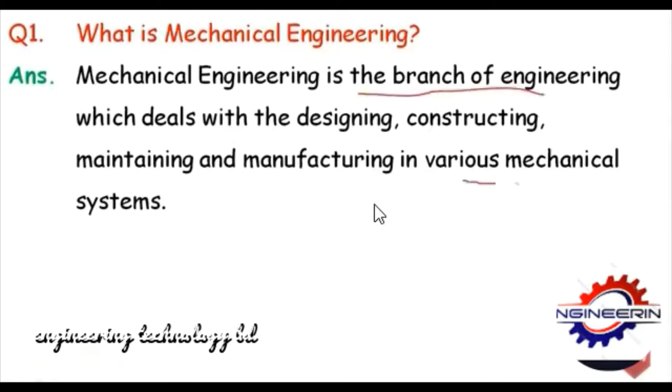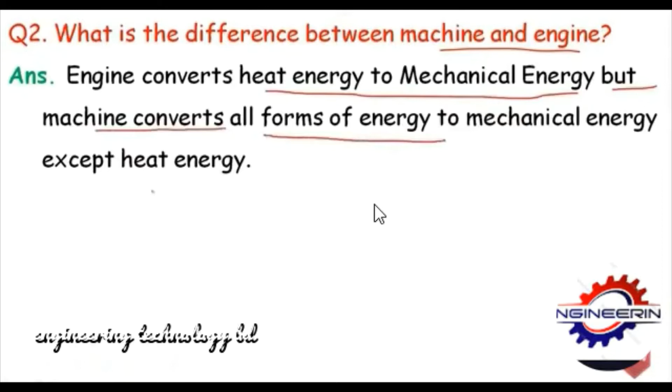Mechanical engineering is the branch of engineering which deals with the designing, constructing, maintaining and manufacturing in various mechanical systems. Question number 2: What is the difference between machine and engine? Engine converts heat energy to mechanical energy, but machine converts all forms of energy to mechanical energy except heat energy.

Question number 3: What is pump? What is turbine? What is the difference between the turbine and the pump? Pump is a device which transfers mechanical energy to the fluid energy. The turbine does the opposite. It transfers the flow energy of the fluid to mechanical energy.

Question number 4: What are turbo machines? Turbo machines are devices which transfer energy to or from the fluid by the dynamic action of rotating blades. Question number 5: What is the difference between the centrifugal pump and positive displacement pump? In centrifugal pump, the flow rate changes with the head, but in a positive displacement pump, the flow rate remains the same.

Question number 6: What is the difference between the heat engine and heat pump? Heat engine produces work and transfers energy from high temperature to low temperature medium. In a heat pump, external work is needed to transfer energy from low to high temperature medium.

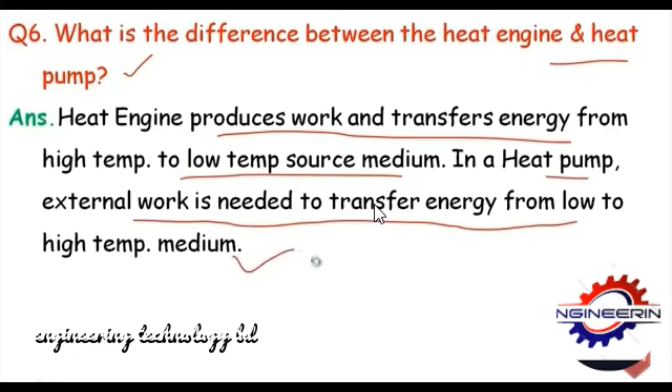Question number 7: What is the difference between impulse turbine and reaction turbine? In impulse turbine, all the pressure energy is converted to kinetic energy, but in reaction turbine, a part of the pressure energy is converted to kinetic energy and the rest remains as pressure energy. Number 8: What is gear ratio? It is the ratio of the number of revolutions of the pinion gear to one revolution of the idler gear.

What is the difference between a machine and a mechanism? A mechanism consists of links forming a constrained kinematic chain. Its function is basically to transmit or modify motion. A machine is a mechanism, but here we are concerned with the force to be transmitted and it is used to modify mechanical work.

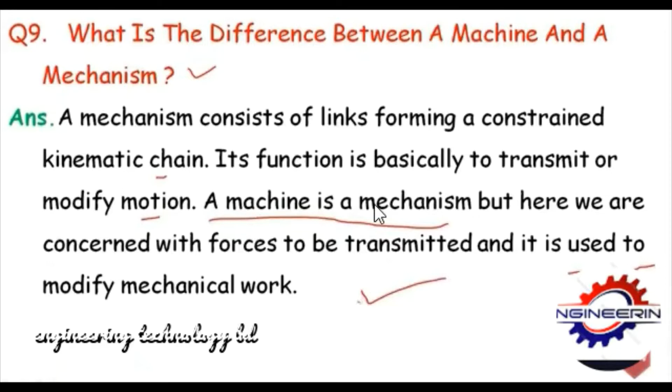Question number 10: On what factors does the efficiency of a pump depend? Efficiency of a pump depends on the size, speed and proportion of the impeller and casing. Number 11: What are the losses in a centrifugal pump? The losses in a centrifugal pump are friction losses due to eddies in flow, leakage, friction loss due to rotation of impeller in chamber of water, gland and bearing power losses.

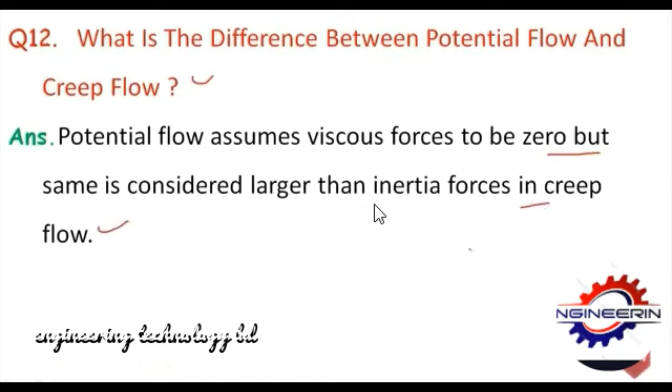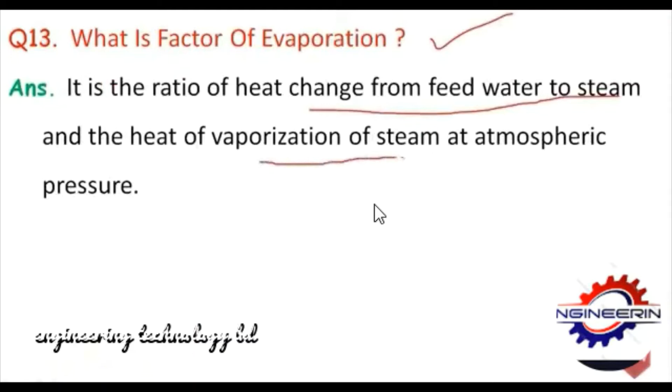Question number 12: What is the difference between potential flow and creep flow? Potential flow assumes viscous force to be zero, but the same is considered larger than inertia force in creep flow. Question number 13: What is factor of evaporation? It is the ratio of heat change from feed water to steam and the heat of vaporization of steam at atmospheric pressure. Question number 14.

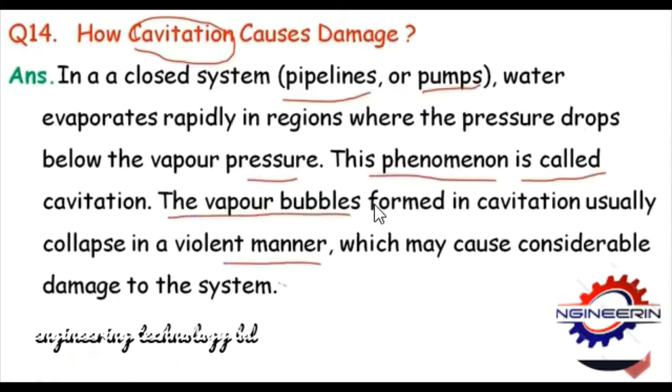How does cavitation cause damage? In a closed system, pipelines or pumps, water evaporates rapidly in regions where the pressure drops below the vapor pressure. This phenomenon is called cavitation. The vapor bubbles formed in cavitation usually collapse in a violent manner, which may cause considerable damage to the system. Question: What should be done to avoid cavitation in pumps? In order to avoid cavitation, the suction lift and the operating.

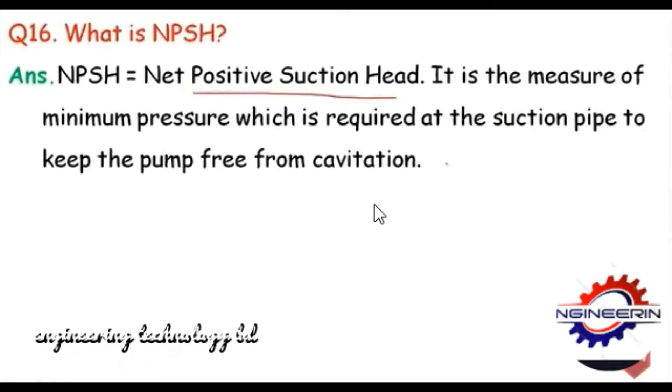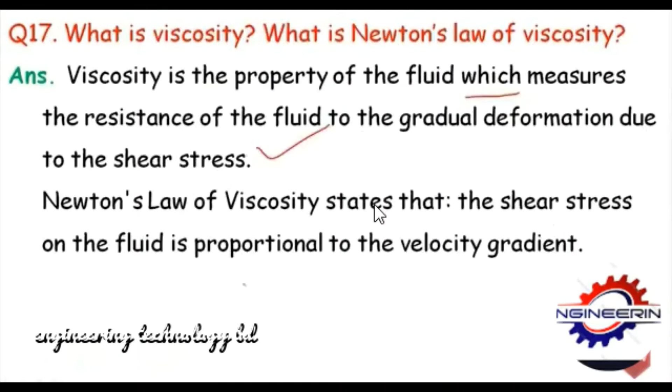Question number 16: What is NPSH? NPSH, net positive suction head. It is the measure of minimum pressure which is required at the suction pipe to keep the pump free from cavitation. Question: What is viscosity? What is Newton's law of viscosity? Viscosity is the property of the fluid which measures the resistance of the fluid to the gradual deformation due to the shear stress. Newton's law of viscosity states that the shear stress on the fluid is proportional to the velocity gradient.

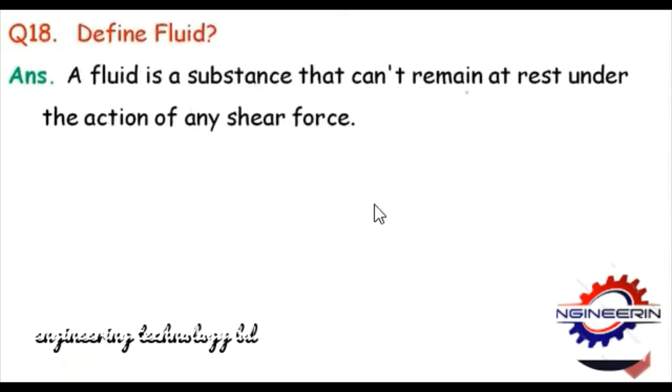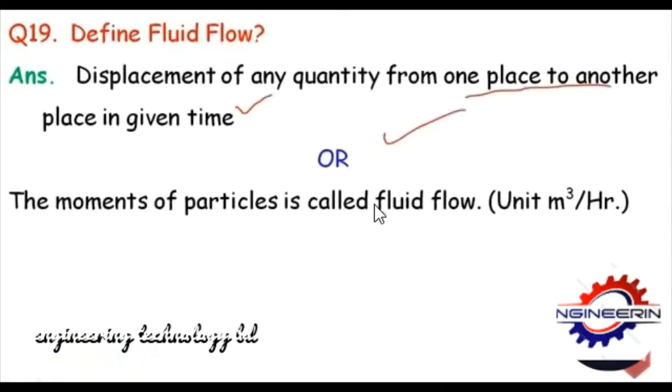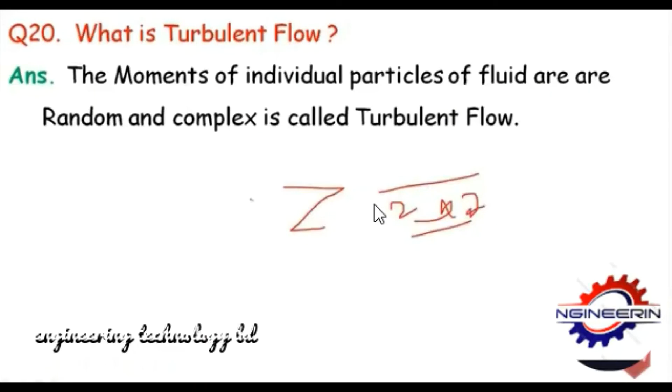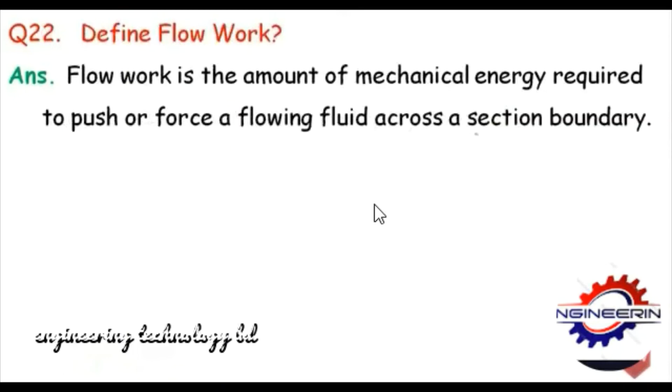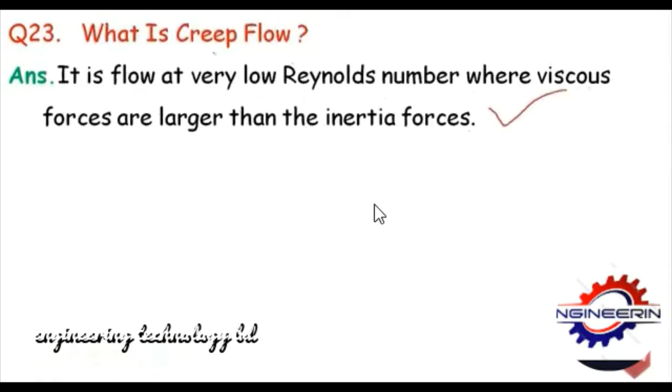What is creep flow? It is flow at very low Reynolds number where viscous forces are larger than the inertia force. What is the difference between steady and unsteady flow? In steady flow, the velocity at a given point does not change with time, whereas in unsteady flow it changes with time. Define surface tension. Surface tension of a liquid is the work that must be done to bring enough molecules from inside the liquid to the surface to form one new unit area of that surface. Its unit is Newton meter per meter square or Newton per meter.